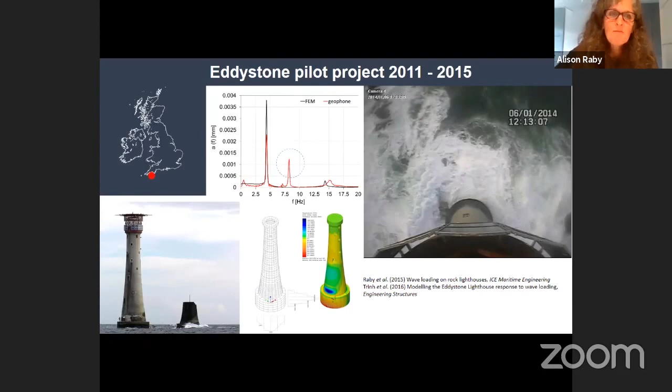That initial pilot project showed that actually the structural vibrations were very limited, fractions of a millimetre. We did a structural model with the Politecnico di Torino in Italy, a simple finite element model. And what we found was that the geophone data didn't quite match up to the finite element model data. The geophone data showed something at 8 Hertz that wasn't visible in the actual model. We measured it, but we couldn't numerically simulate it.

So that led on to a much more comprehensive project called STORMLAMP that started about 4 years ago. We extended the project to include a field campaign led by University of Exeter and University College London, where they did much more comprehensive structural modelling. Obviously we brought to the table the hydrodynamic modelling that we do at the University of Plymouth. You can see some laboratory modelling here, some computational fluid dynamics modelling here. We also looked at some long-term statistical projections to try and work out what the wave loading would be. That wave loading was provided to the structural model, which in turn had been validated by modal testing.

So in fact, the first step was to do modal testing of 7 rock lighthouses in the UK and in Ireland. Wolf Rock and the Fastnet Rock were also the subjects of a long-term monitoring campaign. The Wolf Rock Lighthouse revealed structural vibrations equivalent to earthquakes in storm conditions. The Fastnet Rock Lighthouse had much more modest vibrations because it's higher up out of the water and because it's a much more massive structure. We are now producing a guidance note for the UK and Irish General Lighthouse authorities.

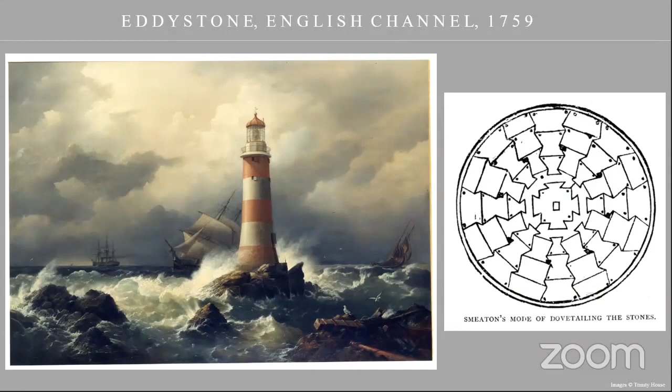Following these prototypes, many of which survived, the blueprint was found here on the Eddystone again by John Smeaton. We've touched already on the Eddystone, but I just wanted to briefly highlight the principles of this successful blueprint: the tapering tower with its low centre of gravity, its entire masonry construction, and of course the dovetailed stonework, which for me really does reveal how far apart from land these buildings are, not just in distance, but also in design and construction techniques.

There are dovetailed masonry structures on land, but they don't have to put up with anything like the wave loading of the rock lighthouses. The intricacy and the ingenuity of the dovetailed stonework here, designed by Smeaton, really kind of embodies their architectural uniqueness, their otherness.

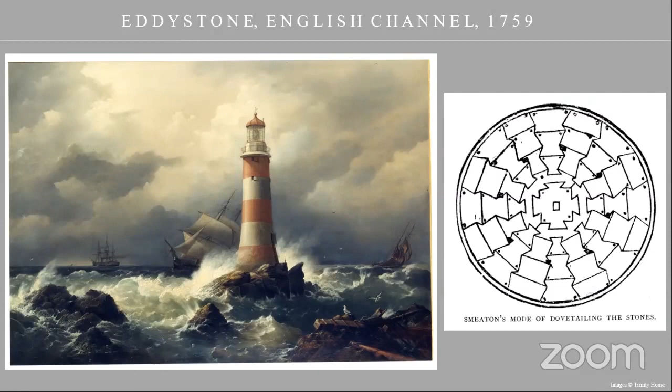This was a formula that would be used in the majority of the subsequent rock lighthouses around Britain. Incidentally, during the research for my book, I did discover that one of my ancestors actually worked on this tower and the deconstruction of it in the late 1870s, which was a very strange thing to find out.

So we have the masonry carcasses of these extraordinary buildings, but I want to make the point, and we see this with the next of them to be constructed in the Eddystone fashion, the Bell Rock in the North Sea in 1811, that these were not just functional works of engineering. These were also buildings with fully thought out interiors.

They were designed not just to show lights, but to house the men and equipment which operated them. And consequently, you have these very interesting interiors in such remote locations.

You can also see, in a way, Robert Stevenson, the engineer's efforts to align this building with the best of the architecture that could be seen on land. It is perhaps a comment on our own age that in the late 20th century, this room was completely removed as part of the modernization of the tower. It no longer exists. We have a lost interior here.

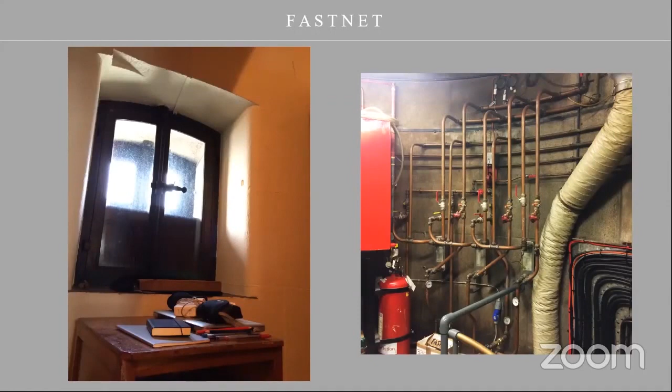I also wanted to quickly point out the network of copper pipes on the right-hand side picture, which is obviously a later addition. But for me, as a conservationist, we're about telling the stories of buildings like this as historic buildings. This is another layer in its story, it's another chapter, and is also a fairly superbly worked piece of craftsmanship. And so I would make the point that if this tower is ever solarized, as is proposed, it would be a shame to remove these other layers of its history, because they do form part of its significance, I believe.

So that's just a quick trot through some reflections on these buildings as heritage, as part of our built heritage, albeit in extreme form.

And I would end by just saying that they continue to be vital, functioning pieces of our aid to navigation network. But I think they also now act as monuments to the great seafaring heritage that Britain has. There are very few traces of this massive amount of history out upon the waves, except these permanent towers. So that is what I tried to convey in Seashaken Houses, and I hope you enjoyed what I had to say. I'm available for any questions, and I'm looking forward to the rest of the talks.

Thank you very much, Tom. That was a really interesting presentation. I'm just very familiar with the engineering aspects, but so good to hear about the historical and conservation aspects.

Our STORMLAMP team are well familiar with the Fastnet Lighthouse after an unplanned one week stay there when they were deploying equipment, doing testing, and the weather changed and they got stranded there for rather longer than they'd anticipated. Yeah, wonderful. I think actually the same chap who took me out there, Neely, I think also accompanied your team. Right. And so we reflected upon the hazards of the weather. I must say the Commissioners of Irish Lights were very, very generous with their time in that respect.

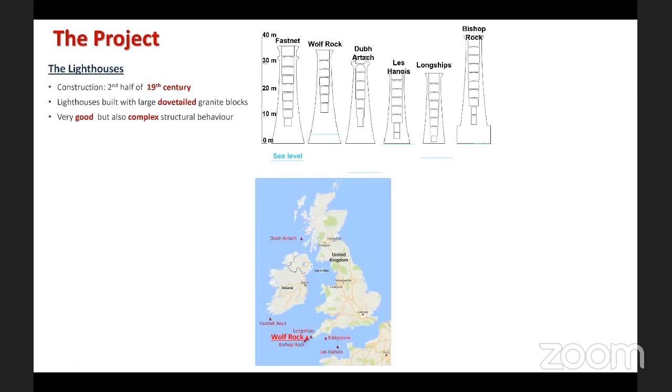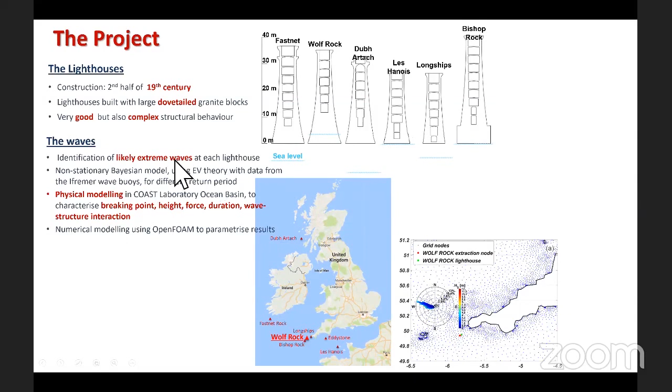So without further ado, if I manage to page down this, yes, I will introduce very briefly the project that Alison had already mentioned. So what are the parts of the puzzle? The 6 lighthouses from the 19th century, designed by Douglass and Walker. We had to determine the waves, and the groups of Bristol used both statistical extreme value theory and physical modeling, as we have heard in the ocean basins, and numerical modeling in order to quantify the waves.

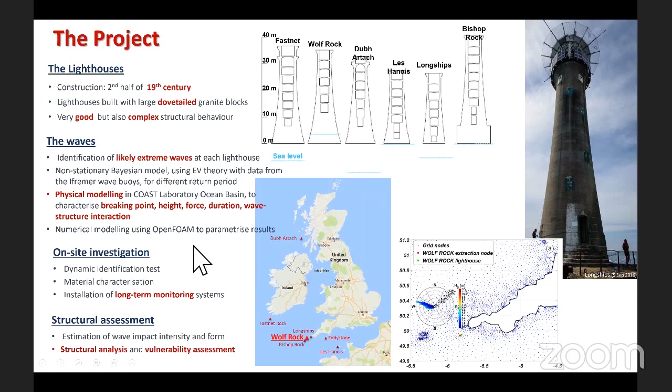The behavior of the lighthouses cannot be understood without looking at Smeaton's Eddystone: the concave elliptic frustum, the anchorage to the base rock by iron bars, the stone blocks shaped and interlocked with dovetails, and the vertical marble dowels and trenails which allow each stone to be located in its perfect position.

We need to understand the ingenuity of Smeaton in relation to the fact that for 150 years there had been failed attempts before him to build lighthouses on rock at sea, and that this particular one then survived for 150 more years.

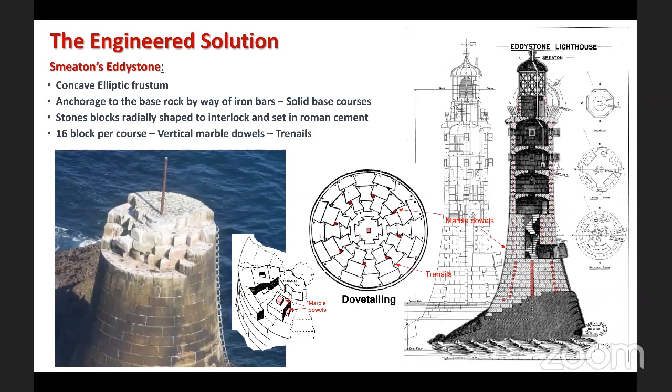But let's go back to the lighthouses that were the object of our interest. These were built in the 19th century, first by Walker and then by the Douglas family, father and sons, and they largely followed Smeaton's prototype, but modified the design to make the stone blocks preparation and construction on site more efficient and robust.

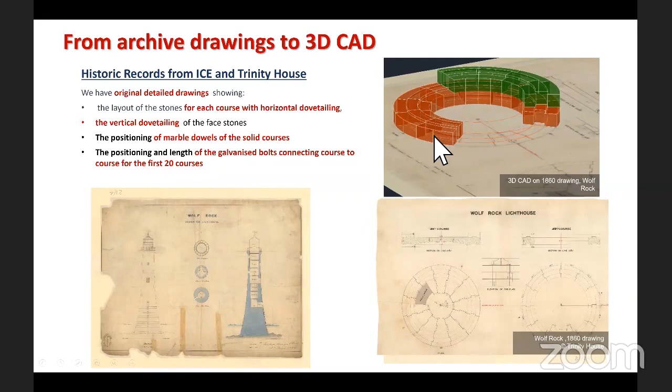The wealth of archival information we have, both through Trinity House and through the historic record at ICE, allows us to build a very detailed model of the lighthouse - 3D CAD models where we've been able to shape each single stone, both with their horizontal and vertical dovetailing.

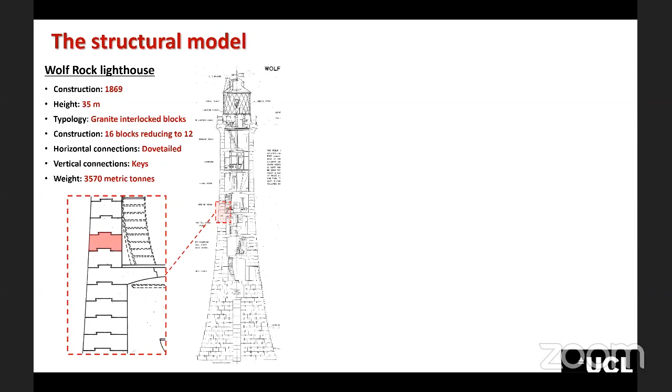When deciding the realization of the structural model, we had to make some strategic decisions. The first was to choose a particular type of software that provides the ability to model the discontinuous nature of the dry stonework.

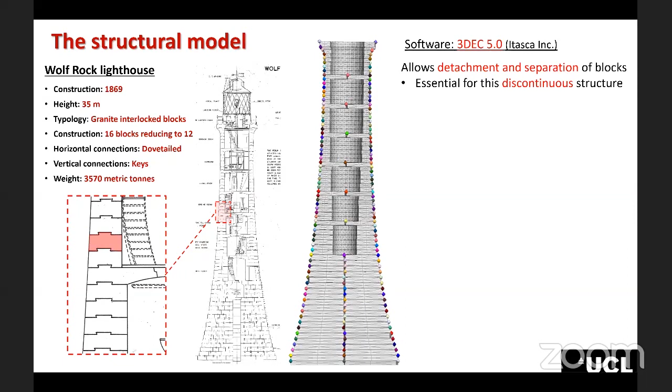Very importantly, we decided to concentrate on the vertical keying, the vertical dovetailing, because this was most important to the behavior of the structures, as we will see in a minute.

The waves were then simulated using the Wienke-Oumeraci theoretical model for plunging waves. We can determine, for a 250-year return period, for instance, the maximum force and the length of impact of that force, which is in the hundredths of a second, while the force is of the same order of magnitude as the weight of the lighthouse, along with the position of the impact height.

These two pieces of information give us enough to understand the possible failure mechanisms - overturning or sliding of the lighthouse. This was already identified by Douglas in his memoirs published by the ICE proceedings in 1884.

In the following, because sliding is prevented by the vertical key I mentioned earlier, we will concentrate mainly on the rocking.

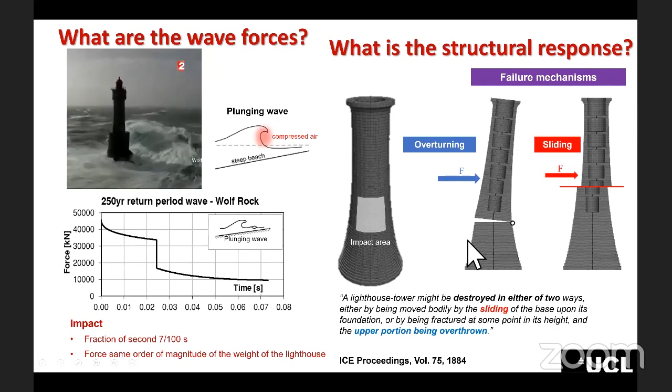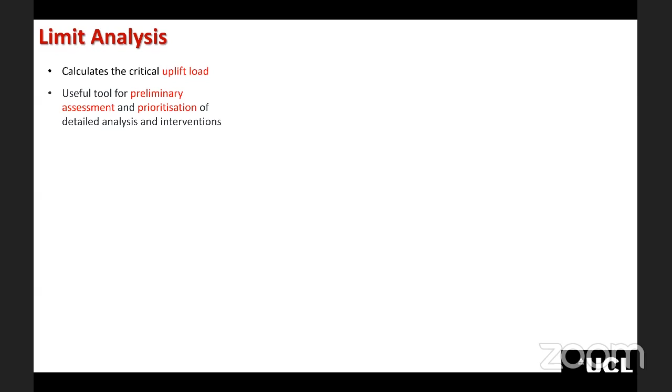Tom Dorey earlier referred to a simplified method to determine when rocking would occur. We can imagine that the rocking can be simulated as something like this.

The lighthouse will break into several portions which will rock with respect to each other. It doesn't really break, because the oscillations are small, as we'll see in a minute, but what matters is that there will be several portions, and this is very difficult to model.

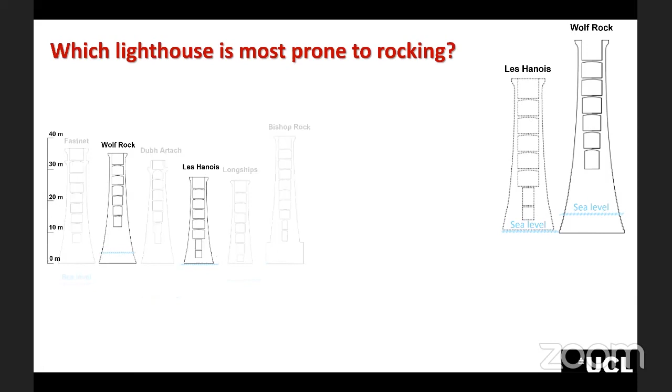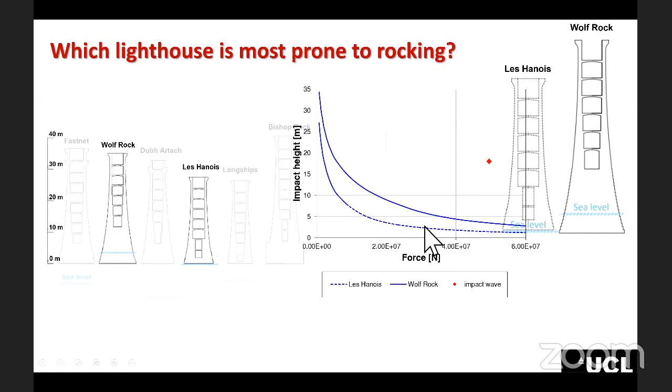However, our simple model allows us to determine a curve of safety, let's call it, for each of the lighthouses. But most importantly, if we nondimensionalize the impact - the height of impact with respect to the height of the lighthouse, and the force with respect to the weight of the lighthouse - for each lighthouse, here we're looking at Wolf Rock and Les Hanois...

...we obtain that those two curves I showed earlier actually coincide, which indicates that basically all the lighthouses were designed to the same principles, and that we can use this principle to assess the whole family with very little deviation.

Given a particular wave - this is the one we computed earlier - the distance from the curve will tell us how at risk the lighthouse might be from rocking.

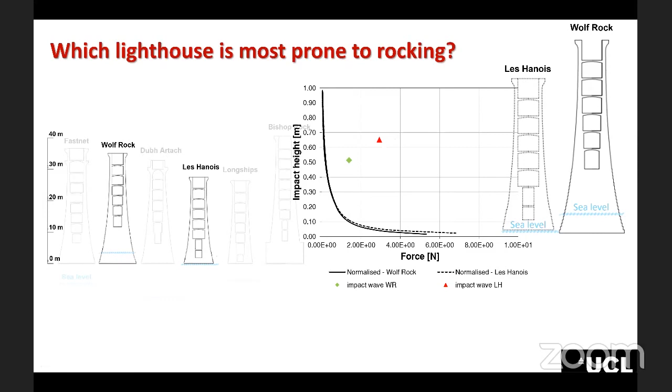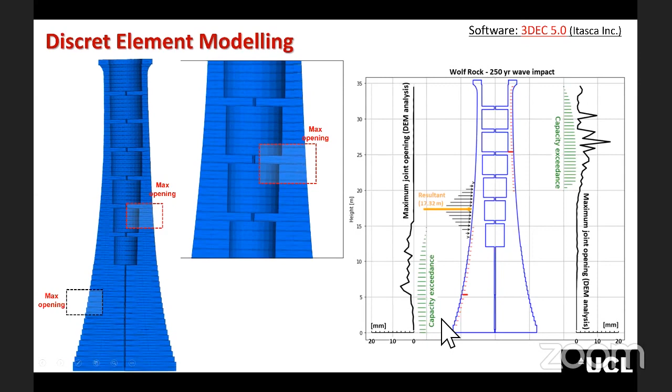From this discrete element modeling, here we are looking at the results from the side of the leeward side. During the impact duration, the top has actually a negative movement in reverse, as can be shown by this first model.

Once the impact completes, the oscillation is the opposite one, and we have a maximum lateral displacement of 23 centimeters over a height of 35 meters. So we need to keep this in context, although it's not a modest displacement, it's basically the size of your laptop screen. What does that mean? Is it a problem?

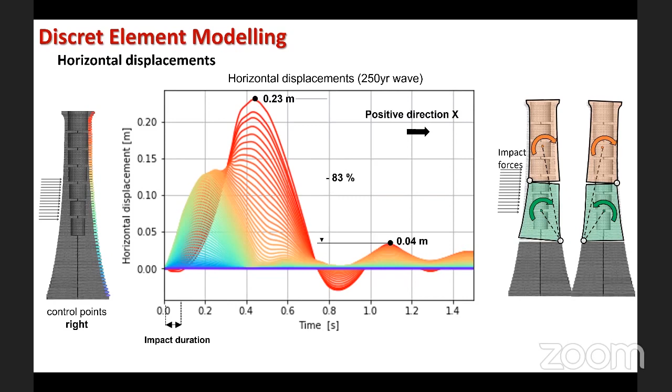In reality, what we also see is that when there is only one major oscillation of this type, the following oscillations are substantially reduced, at 4 centimeters. So much of the energy transferred by the wave is dissipated in the friction and the rocking and the contacts between the stones themselves.

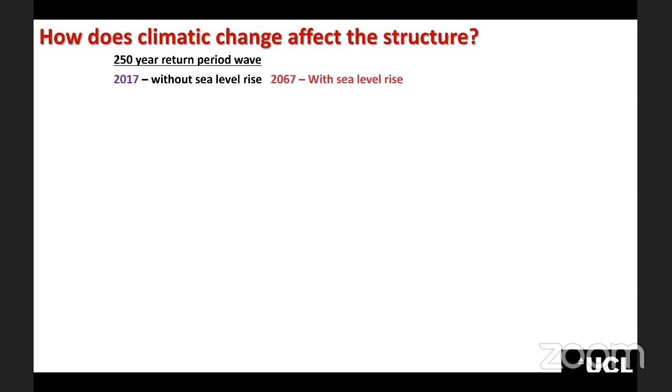How does climatic change affect the structure? This was one of the questions that Trinity House posed to us at the beginning of the project. What we have done here is recalculate the wave considering sea level rise, and we obtain a wave that is slightly stronger in impact force, but of slightly shorter duration, and applied also at a slightly higher height.

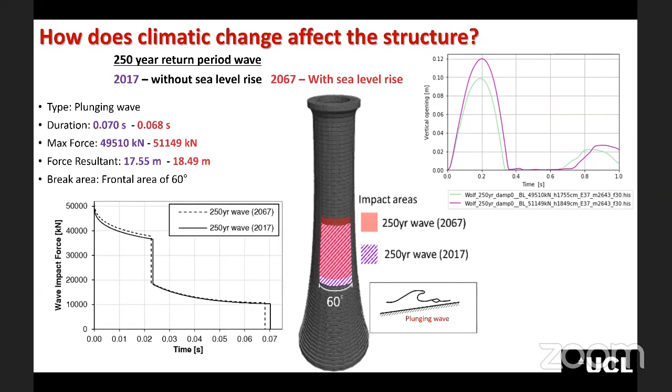What is the result of this? We see that if we sum up all the joint opening that I've shown before, in the presence of sea level rise, we will have a 20% increase of the actual total opening. So although the waves will not be very different in their characteristics, it's sufficient to create a 20% difference in effect, which is quite worrying.

So will these lighthouses be safe? For any single joint, we can see that the maximum opening of the joint, whether with or without sea level rise, is of the order of 23 to 24 millimeters. And if we look at the famous vertical key that I mentioned earlier, these were designed to be 76 millimeters deep, which means that we have roughly a factor of 3 in safety. It is true that the joints will rock against each other, but none of them will be able to climb over the vertical key and slide off to create a real collapse.

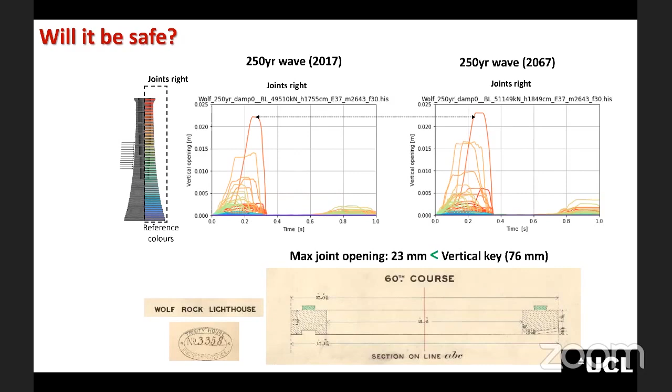Of course, as a result of the rocking, we might have minor damage. So in conclusion, the use of historic information to build an accurate advanced numerical model was fundamental.

However, of course, many uncertainties remain about the wave action and the way in which we quantify it. The vertical keys are, as I've shown, fundamental to explain the behavior of the lighthouses, but also their reliability, integrity, and their survival for the past 150 years.

Limit analysis is useful to predict the threshold of intense rocking, and when adimensionalized can be generalized to the whole family of lighthouses. This means that Douglass had a very good understanding of the relevant importance of the different design parameters, because each lighthouse is slightly different from the previous one, particularly adapted to the rock formation on which it's built.

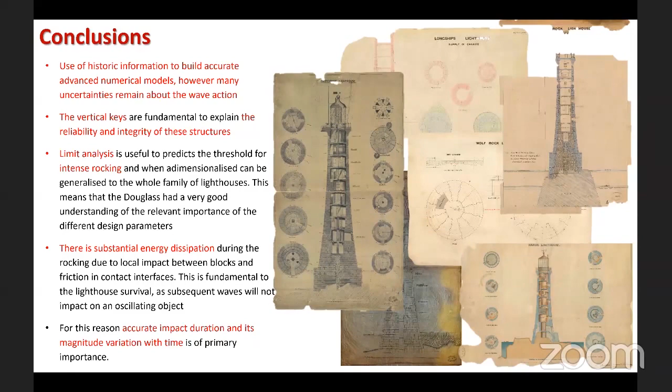So although they are not the same, they were really designed with the same principle. And this, for engineers, is such a wonderful thought to hold. There is substantial energy dissipation during the rocking due to local impact, and oops, everything has just disappeared. Thank you very much for your listening.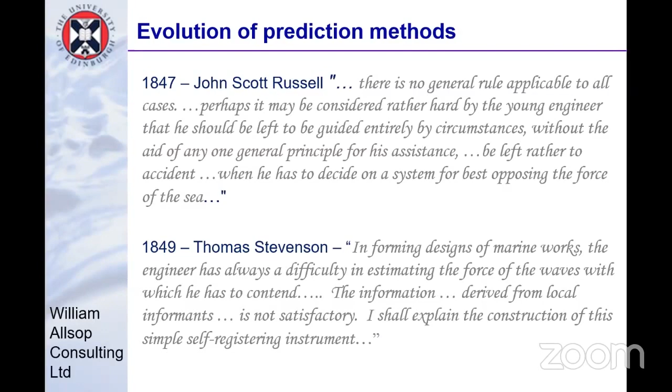And you needed to pre- or post-calibrate the device.

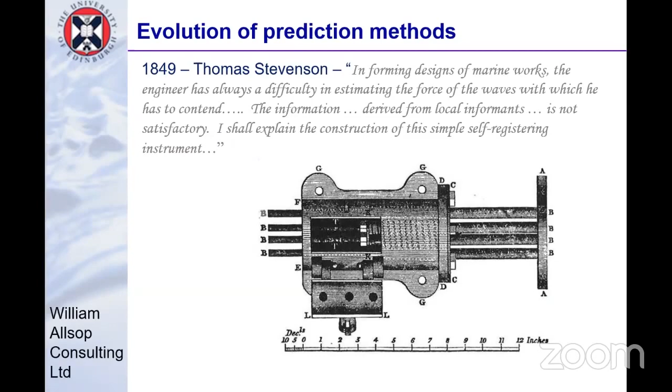Wave force prediction methods, I may have missed a few out, but in my book, the earliest one is Hiroi in Japan, and that would have been only published in Japanese. Sainflou publishes in French in 1928 and is remarkably good. You don't go too far wrong with Sainflou.

Bagnold at Imperial, I think, did some experiments, and some of his guiding principles are still true. Minikin suffers from the fact that his formulae got translated wrongly and have led to the famous P max is 101, blah blah blah, where 101 is pi times g. Let's see how many of you can work that one out.

1970s Ito, cited by Goda, a very simple formula, and one that's really pretty good. We then follow to the famous Yoshimi Goda in 1974, then published in English in 85, 2000, and 2010.

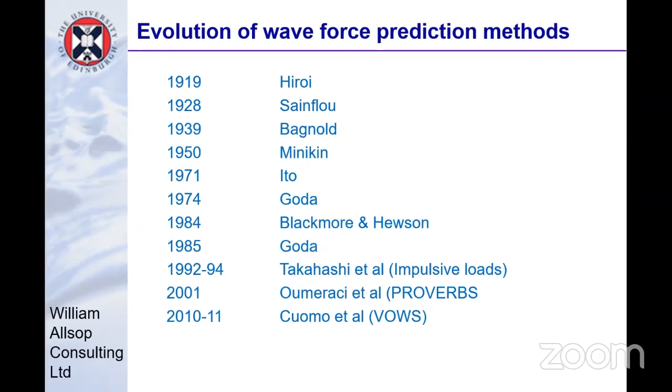Moving on to impulsive waves, in the original research project within Proverbs, Kirsty McConnell, Diego Vicinanza, and I and others have proposed a number of simple impulsive load formulae. Giovanni Cuomo and co-researchers then took those results and some further research measured by Tom Bruce and I under VOWS, put those data together and came up with some revised methods.

So putting all of that together, one would have thought that the loads on vertical walls were well known, but the truth is that horizontal forces have been better predicted, and certainly pulsating horizontal forces are pretty well predicted. Impulsive pressures less well, and I'll show a reason why those aren't awfully clear.

Overtopping and downfall loads have a substantial effect on failing the upper parts of these structures, and were almost certainly the major reason for the collapse of the wall at Dawlish, where impulsive overtopping came over and blasted out the track bed, then allowing the front wall to be knocked off.

What is very poorly known is the seaward forces. There was something in Goda, and there was a little hint in Goda's graphs that show that seaward loads could on occasions be bigger than the positive landward loads.

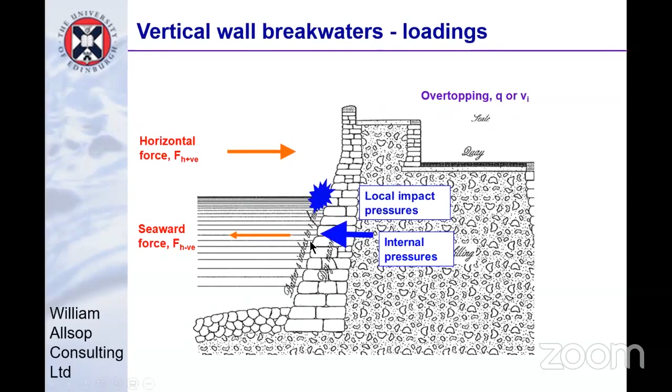An area in which there is virtually no knowledge at all is internal pressures. Although Gerald Muller and his team then at Belfast, and Adrian Pearson, Tom Bruce and I did some testing at Wallingford, supported by ICE, that at least identified outward movement of blocks.

Two minutes, Goda please, had some, okay, get a move on. Right, Goda had some rules on when you ended up with impact loads. I then drew this diagram from that.

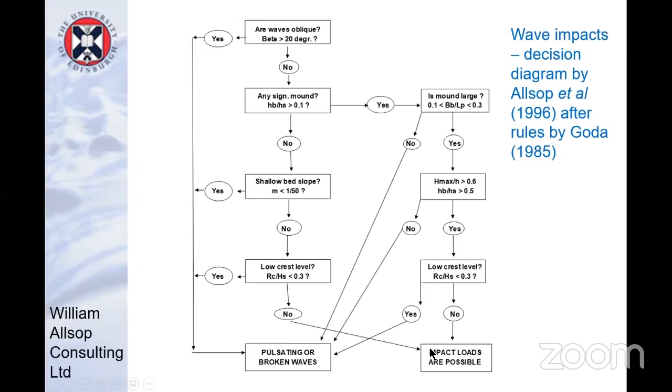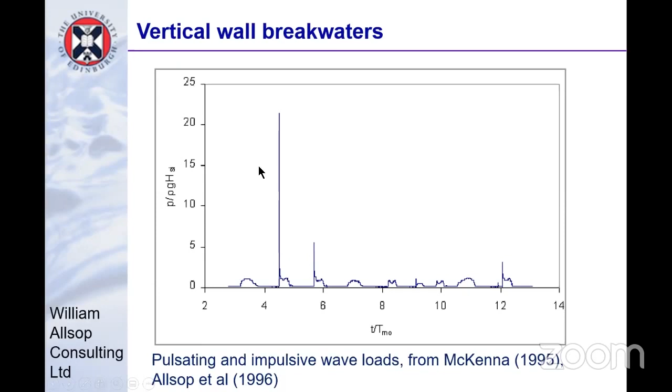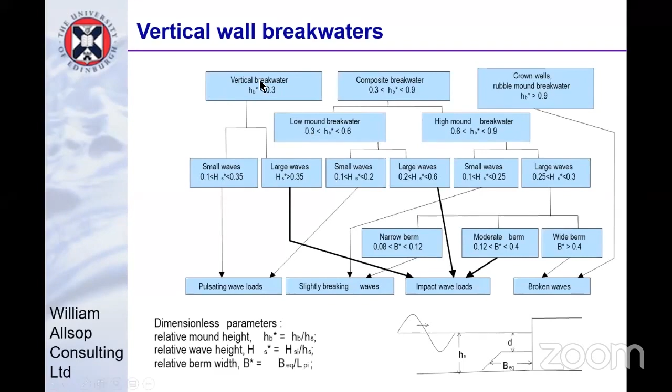These are enough to have moved structures backwards, and present design methods in Japan actually calculate displacement back. The updated rules in Proverbs are more complicated but more comprehensive.

So the procedure that we outlined at the end of Proverbs, and that I've been using for my case studies, is calculate the waves subject to shoaling and breaking, then calculate a breaker classification on the mound, estimate a first version of the wave loads, improve it to Goda, then, and you always do that, whether you're likely to have impulsive loads or not.

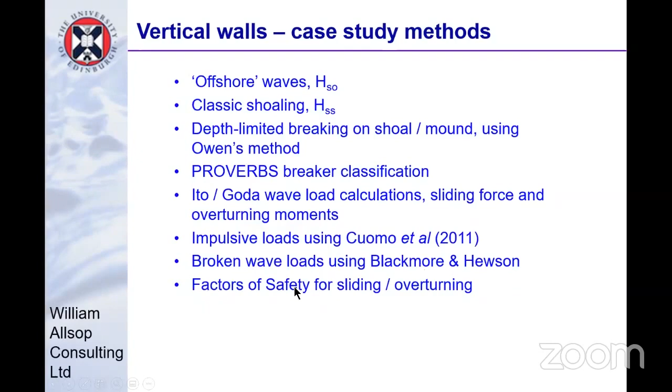And then you calculate impulsive loads and/or Blackmore-Hewson's broken loads. This illustrates the impossibility of a single impulsive load. At any exceedance probability, you could be anywhere on this envelope.

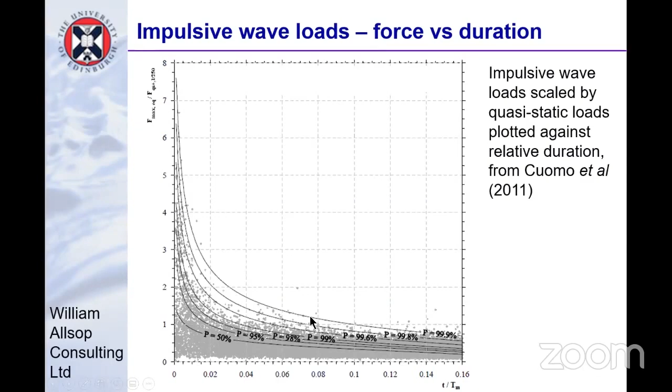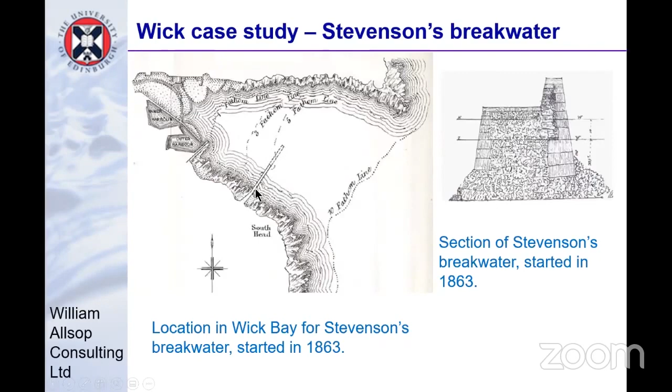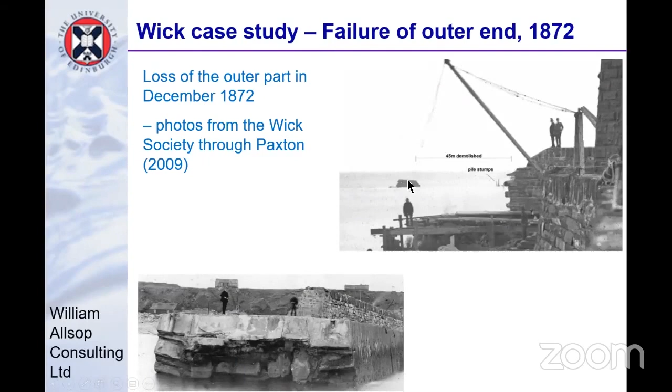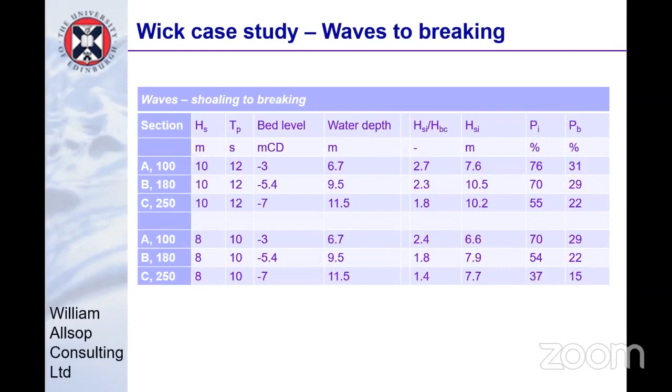Three stages. Firstly, shoal the waves, then apply a breaking limit. Use Calabrese's method to calculate the percentage of breaking waves or impulsive waves. Get a first handle using Ito or Goda. Ito a bit more pessimistic, mostly.

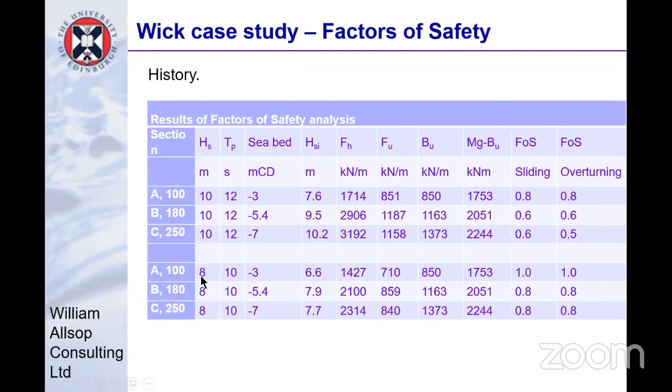There we have the Goda loads, and then calculate factors of safety of sliding or overturning. It's quite pleasing, given that Wick breakwater has disappeared, to find that it does have factors of safety well below 1 for virtually all of it, except the root, and that's with a lower wave height than what we think probably did occur.

So to conclude, the design methods were initially entirely based on experience, and the formulae were really only available after Sainflou in 1928. In truth, they weren't really available until close to the turn of the century.

One should always calculate the momentum-based loads using Goda. Impulsive loads can be very much higher, but will be very much shorter. To use the impulsive loads, you almost certainly need to take some sort of dynamic analysis.

I've shown you the results for Wick. Those for Alderney and Dover are in a pair of upcoming papers in ICE Forensic Engineering.

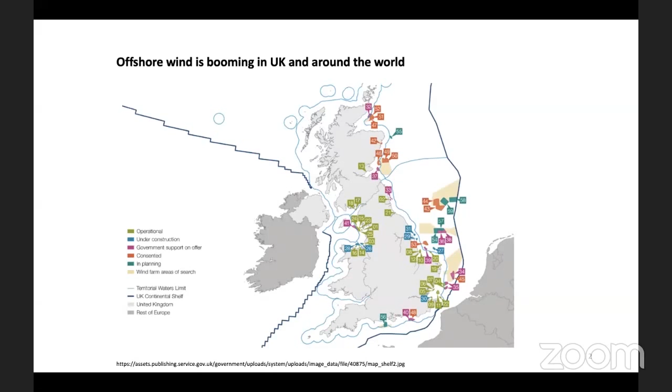So the offshore wind industry is booming, as everybody knows, both around the UK and around the world. This picture shows a few development regions, mostly on the east coast of the UK, although some on the west coast. The number of offshore wind farms which are installed, planned, or consented for shows enormous numbers of fixed turbines coming.

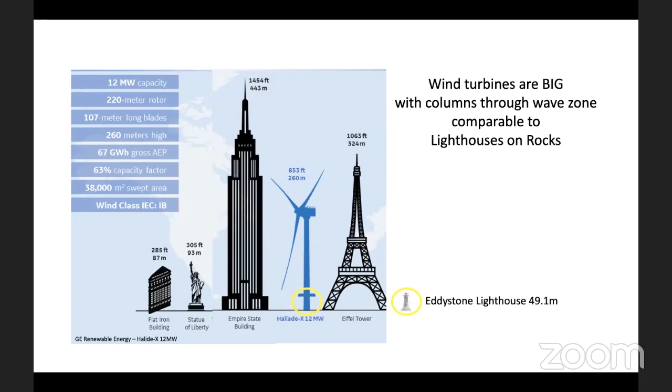There are a whole variety of different concepts planned for both fixed and floating offshore wind, but I'm going to concentrate on the simplest, on the extreme left, of a single column, bottom-mounted column with the turbine mounted on top. In deeper water, you might go to a truss structure, and if you want to go even further offshore, you might go for floating. One of the things we're doing in Australia is a small amount of work on the responses of floating wind turbines, but I'm going to talk about fixed today.

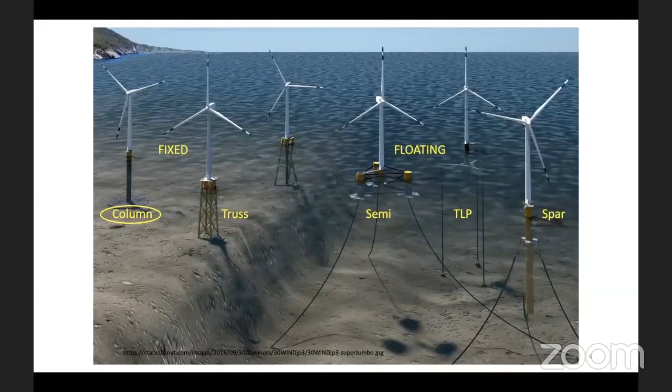A few more pretty slides just showing how large these structures are. The small structure in the foreground is essentially the electricity substation, which is absolutely dwarfed by the towers.

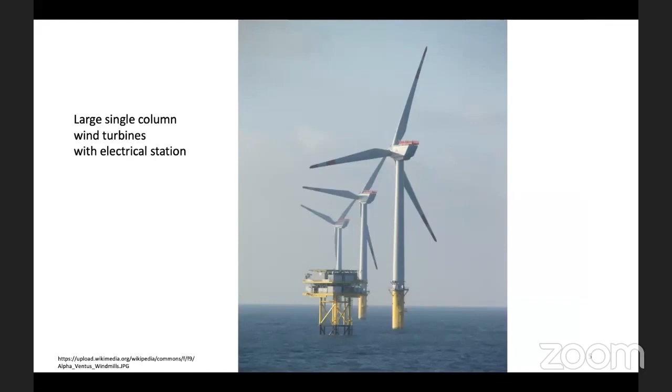For fixed columns, there are various different types of foundation used. You might have a tripod with 3 corners piled into the seabed. You might use a suction gravity base type structure or other concepts, but they all have a single column coming up through the free surface. So the loads on them are predominantly close to the free surface, so they get similar wave loads.

I want to talk about some work that we first presented a couple of years ago in a Journal of Fluid Mechanics paper, based on experimental work done at DHI in Denmark several years prior to that, where we examined in some detail the fluid loading and the induced forces on single isolated columns.

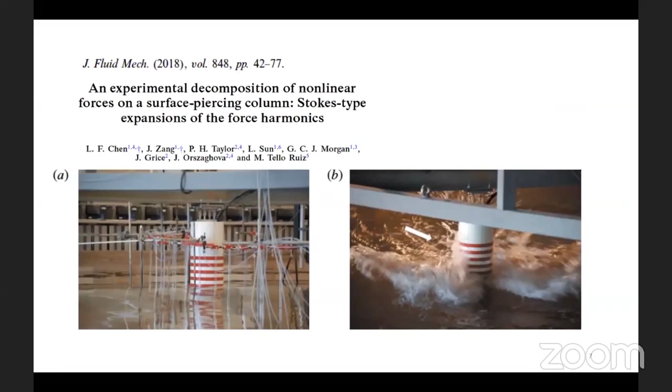The concept for this is we're going to look at smooth loads, which are essentially relatively easy to analyze and understand, and then also some slam loads at the end.

Let's start off with the expansion for a regular wave, a so-called Stokes wave expansion. You can see the top formula, 3.1. We have a component, cos theta, the normal linear component, a double frequency and triple frequency component, and you can go as high as you want, with amplitude non-dimensionalized by the radius. Each term has a nonlinear coefficient on it, called in this case SEE2 for example, which describes the interactions at second order for elevation, hence E, multiplying the A upon R, the non-dimensional size of the wave, and then the cos 2 theta function being the time variation.

We can generalize this regular wave solution into what happens if you have an irregular wave train, by simply replacing cos theta with a linear narrow-banded process I'm going to call eta 1. Then if you want a double angle, cos 2 theta is cos squared minus sine squared, so that simply becomes eta 1 squared minus eta 1 Hilbert squared, and the Hilbert transform does the 90-degree phase shift. That turns out to work really quite well for regular waves, and irregular waves, which are non-breaking.

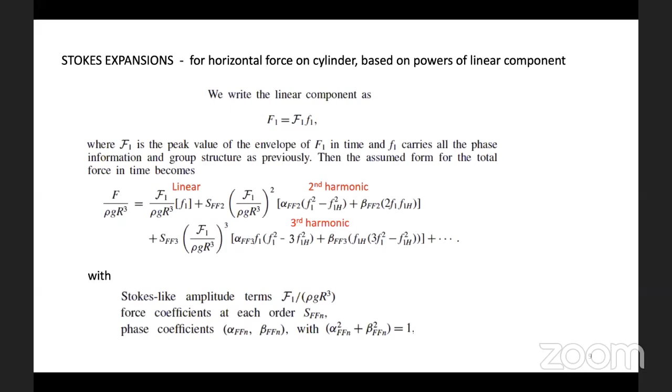Let's see if that actually works. So what we have here are incident waves on the left and force time histories on the right, Stokes expansions running from top to bottom. The linear component contains all the main energy transporting information. We get a second order set-down term, a double frequency term, a triple frequency term, etc., as high as you want to go. And that works very nicely for the incident waves.

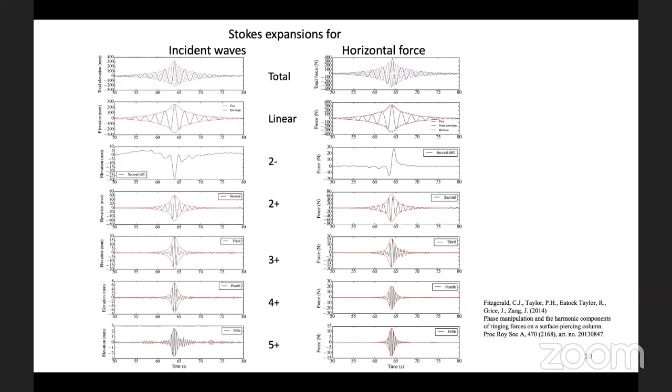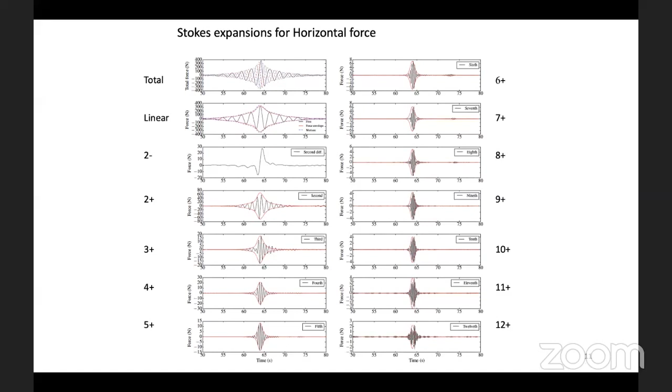But the basic idea is that we can describe all the harmonic structure for the forcing in terms of the linear time history, which is easy enough to calculate.

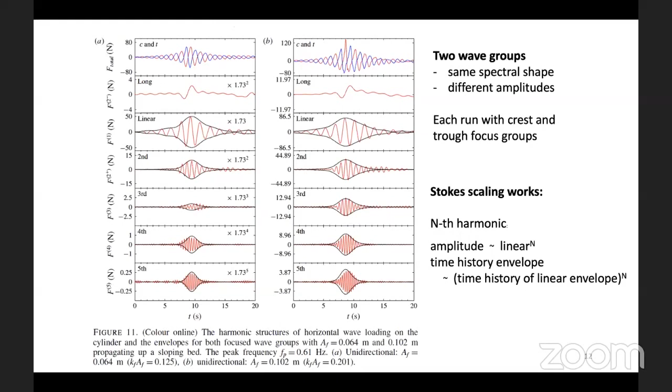Using a second order diffraction code, the Oxford diffract code, we can conclude that linear and second order theory works well. There's little drag.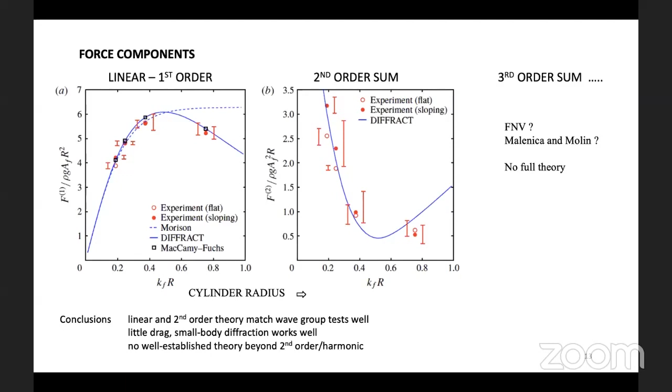We're in a regime where the cylinder size and the wave amplitude are comparable, so we're essentially in a small body but violent diffraction regime. There's no well-established theory beyond second order—some theory of third order, but nothing beyond that. But the decomposition in terms of linear signal to the relevant power seems to work quite well.

Let's try and build approximations. We've done that here for the 2nd, 3rd, 4th, and 5th harmonics, everything based on the linear signal. The total measured force time history is at the top, and you can see the 2nd, 3rd, 4th, and 5th harmonic sums. Underneath the red curve is a dashed blue curve reproducing the harmonics using simply powers of the linear component, and you can see that works really very nicely for this case.

There are other complications one should include for cylinders, and this is beginning to look more like the lighthouse case. The slam loads can be significant depending on the violence of the breaker, and their structural dynamics—you can see on the right-hand side a case of the force transmitted into the foundation due to a crest-focused wave group hitting a column, where the resonant frequency of the structure is about 4 times that of the wave.

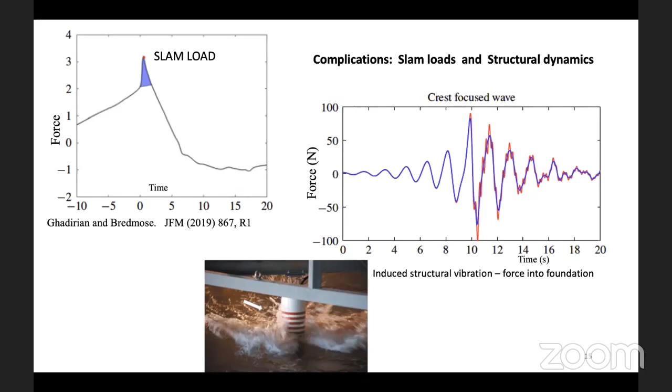So there's substantial structural dynamics, with the largest response into the foundation being the swing back rather than the applied load in the wave propagation direction. Slam loads are associated with impacts on the front of the column—a violent sheet of fluid thrown up the front. A couple of nice photos from quite an old paper by John Chaplin, Rainey and Yemm, published in JFM.

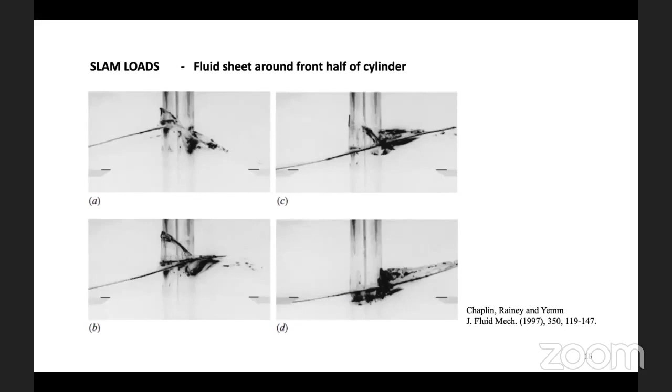So to summarize, I'm suggesting it's possible to do a decomposition for the horizontal loads and moments in irregular waves on a surface-piercing column. This works well for smooth load components, for which the Stokes expansion for the harmonics can be produced—so the harmonics are simple nonlinear functions of the linear component—but there is a suggestion of a little extra physics at third order, which may be related to the FNV ringing model.

We need a model for additional slam loads, which we're presently working on. The ultimate aim is to produce a simple design recipe for wave loads on offshore wind turbine columns—you're not going to have the time or computer power to do a CFD calculation for each column as you change the wave properties a little bit.

I'd like to acknowledge my co-workers on this, particularly Jun Zang at Bath, Tom Adcock in Oxford, Li Fen in UWA now, was in Bath, and Samar Rays that we've had in Oxford, and many others. Thank you very much, I'll finish at that point.

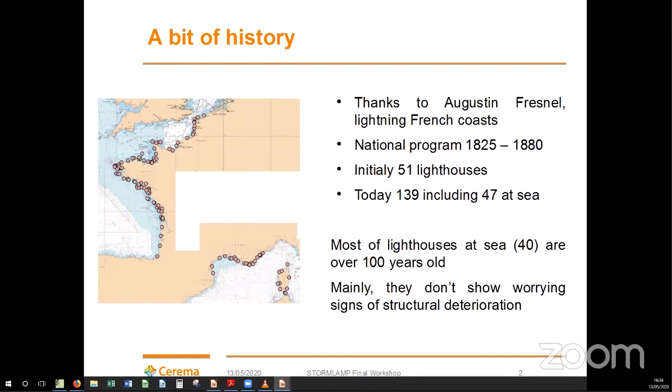So a few words first on the French Aids to Navigation organization. The management of French lighthouses is the responsibility of the Ministry of Ecology and Transport. We can compare that to Trinity House, as it was presented by Rob previously. CEREMA, as you said, Alison, during your introduction, is the technical partner of the Ministry for studies, development of methodologies, capitalization of best practices, and innovation or research on all the skills related to aids to navigation, including civil engineering. Sometimes we develop partnerships with academic or industrial laboratories to go further because, as an African proverb says, alone you go faster, but together you go further. And the two cases I'm going to talk about are a good example of such a partnership.

Let me introduce our first case study, La Jument. La Jument is located in Brittany, close to Brest in the Ushant Island area. It is one of the most famous French lighthouses, thanks to many spectacular pictures of it. It was built at the beginning of the 1900s, and it is representative of the sea constructions made at this time, with maybe low knowledge of masonry dynamic behavior or on swell.

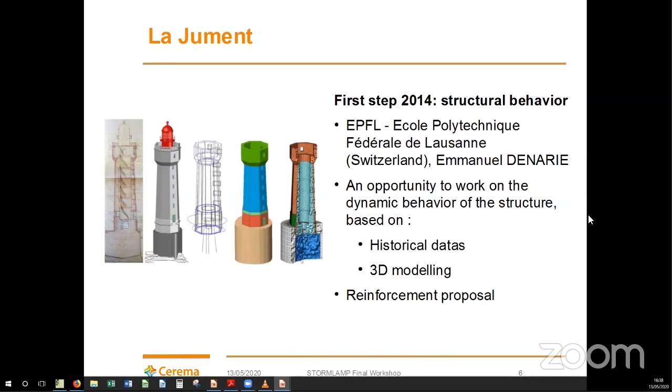But this solution was no longer considered at this time, because then we moved to a second approach in order to work on the dynamic behavior of the lighthouse. And since 2017, we have been working on two aspects.

First, characterizing the swell on site. As you can see on the pictures, we need to characterize the swell especially at this site. We did that through a partnership developed for that purpose with academic institutions, France Energies Marines, and other institutes such as Ifremer and SHOM, which is our hydrographic institute. The aim is to identify the efforts due to the wave on the structure. We have been using different sensors for that: radar, wave buoys, and also stereo cameras.

In parallel, we installed some accelerometers on the lighthouse to measure its response under these efforts. The idea, of course, is to cross those data to link the effect of the waves with the degradation of the lighthouse. Here you can see a record from the stereo cameras, which gives a good idea of the elevation of the wave on the site, more than 10 or 12 meters between top and bottom, or blue and yellow.

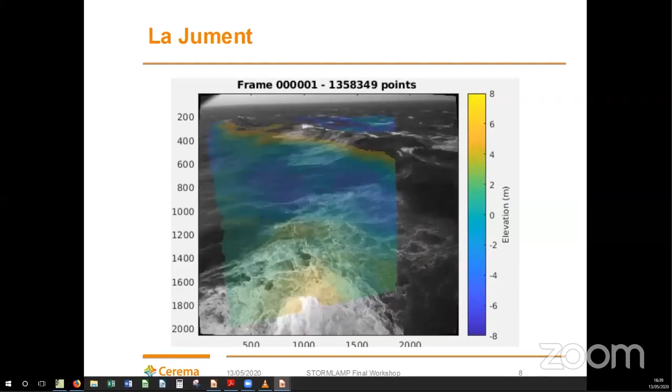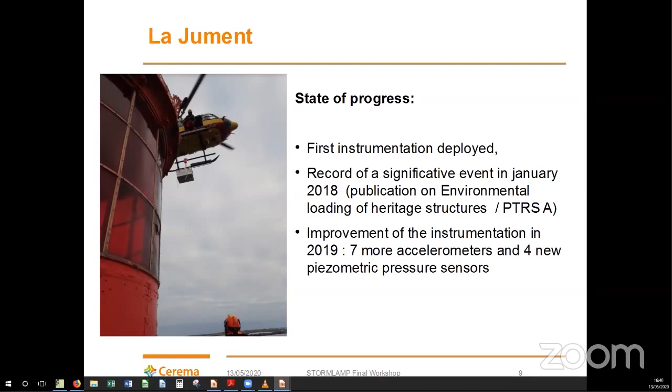And now, where are we now? First instrumentation had been deployed, and we recorded a significant event in January 2018. Besides, with the help of Professor Alison Raby, we published a short article on that experience, which you can see on the slide. Since then we improved the instrumentation by adding more sensors, including pressure sensors. No results to share at this time because of the impossibility of going to the site by now, and we will have to wait for the end of the lockdown to go back there.

Our second case study is L'Île Vierge Lighthouse. L'Île Vierge means Virgin Island. It was built in the same period as the previous one, and is known as the highest lighthouse in Europe at 82 meters high. It's close to Brest also.

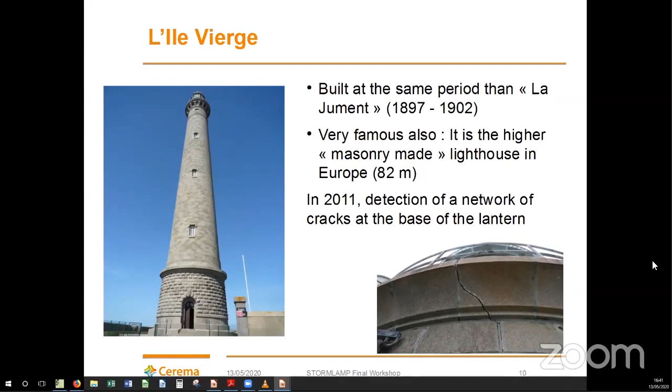We first thought that the cracks should be due to corrosion of the steel frame inserted into the stone. It's a phenomenon we encountered on several other lighthouses previously. But when we disassembled the frame, there were no traces of corrosion on this part of steel. So we started to work in order to find another explanation before fixing the cracks.

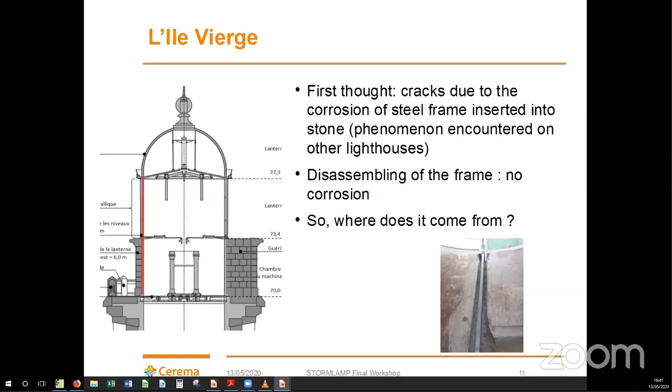We then contacted an academic laboratory at the National Institute of Applied Sciences, INSA, in Toulouse. They launched a thesis on the topic, called Development of a Diagnostic Methodology for Masonry Lighthouses.

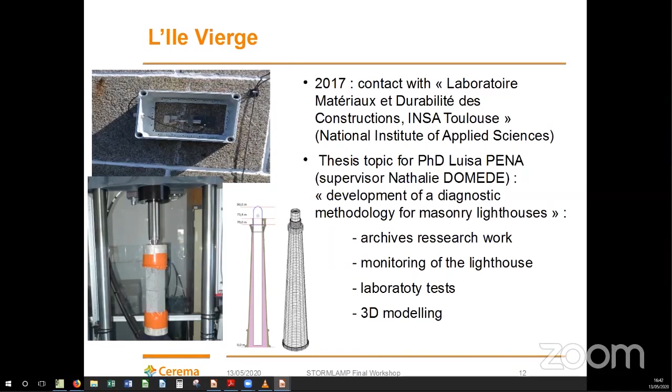Thank you so much, Michel. Thank you very much for an excellent presentation. And we also acknowledge Nicolas Fadi in the wings as well, who has been working on various aspects of this research over the years. I've met Nicolas on a couple of different occasions.

It's also interesting to see you presenting the work from Île Vierge, and Nathalie Domede was able to spend some time at Plymouth and UCL last summer, I think, or maybe the summer before, and we talked about the modelling of that lighthouse. So it's really great that just coincidentally we've been working on very similar topics in parallel, and from time to time we've been able to overlap and encourage each other and share some of the struggles and successes of working with these amazing structures. So thank you, Michel, very much.